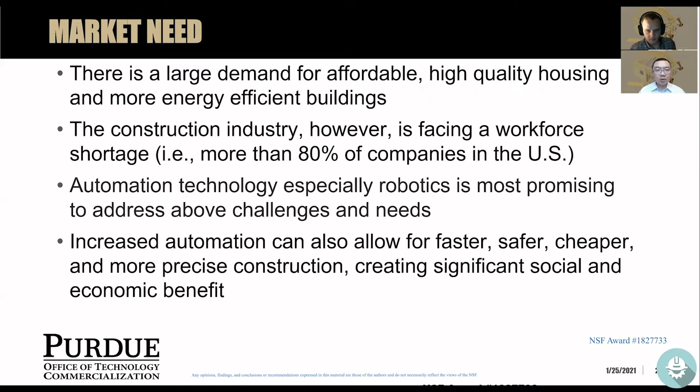Here are some figures that back up what we were talking about. According to market analysis firm Tractica, the global market for construction robotics is set to grow from 22 million globally per year in 2018 to 226 million globally per year in 2025. So there's significant room for growth in this area.

The other factor is the labor force shortages we mentioned earlier. Because of that, the market window for construction robotics is now for the construction industry to reap its benefits.

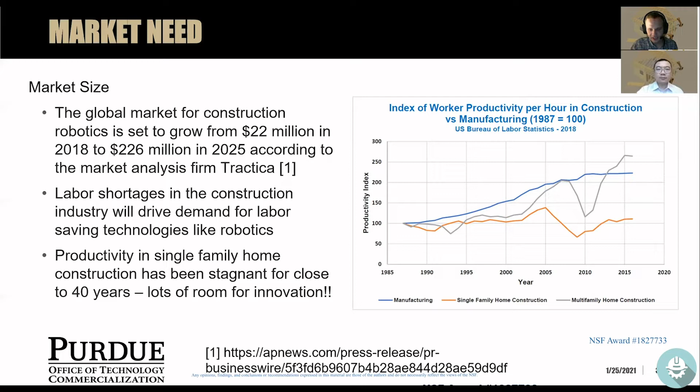The technology we're presenting, which we believe can help address these challenges, is a robotic system for the automated sheathing of timber frame structures. We've developed a novel end effector design that can be attached to existing industrial robot arms to facilitate the sheathing of timber frame structures with the device.

We've also developed a software framework, including a computer vision algorithm, that should allow this system to operate successfully on the construction site. We've completed all the designs for the end effector, in addition to developing and testing the software components, and had plans to test the full-scale device with a KUKA industrial robot arm in a laboratory at Purdue this summer.

But due to COVID-19 related restrictions, we were unable to do that. We're still ready to test the technology and start bringing it into the real world.

We view this system not just as a product in itself, but as a starting point to creating a platform for construction robotics, building a system that ultimately is very modular and able to complete a wide variety of tasks.

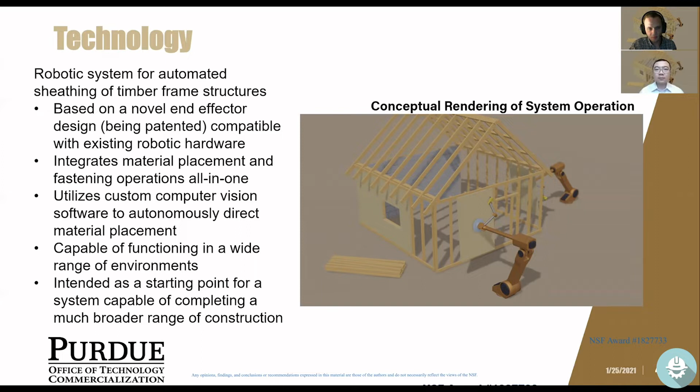Here are some competitive advantages of our technology. Currently, there are no robotic solutions on the market for the automation of timber frame construction on site.

There are existing systems that do a similar task, but they're much more oriented towards operating in a factory environment. We're looking to take that technology and make it simpler, more robust, and able to operate effectively on a construction site.

Our technology spun off from National Science Foundation sponsored research, and we're also in the patenting pipeline for this technology. The integration of paneling placement and fastening into one operation will allow for simpler design, lower cost, and significantly higher speed compared to existing systems.

I'd like to quickly mention the story of Tesla Motors, who changed the conventional welding operation on building the bodies of their Model Y to the forging method, switching 1,000 to 1,500 welding operations into one simple forging operation, which changed the time spent from 2 hours to 2 minutes. Following a similar rationale, our technology is going to build these much faster.

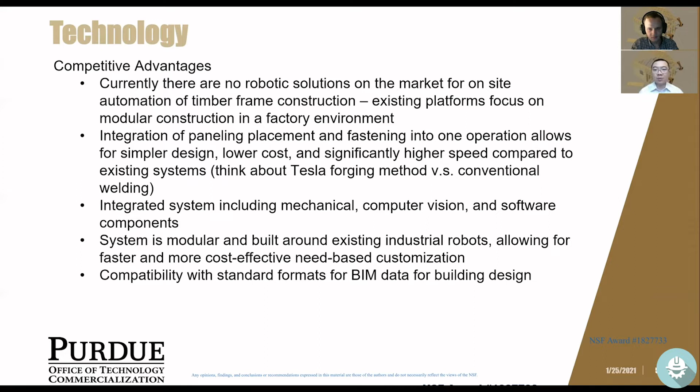So our project is currently in the initial stages of development and testing, and we're seeking partners to help further develop our technology and bring it to market. Thank you very much for watching our presentation, and we hope to hear from you.

Hi, my name is Christopher Carangelo, and today I'm going to be talking to you about polyethylene graphene, or PE graphene, a nanocomposite film with superior mechanical strength.

There are several industries that have an ever-growing need for high strength-to-weight ratio materials. Take, for example, automotive. The lighter the car is, the further it can travel on less fuel. Traditional materials like steel and aluminum, while being cost-effective and easy to produce, are becoming too heavy for the market's current needs. So the automotive industry has become more ready to adopt composite materials, such as carbon fiber, and we've seen it used in the past on supercars.

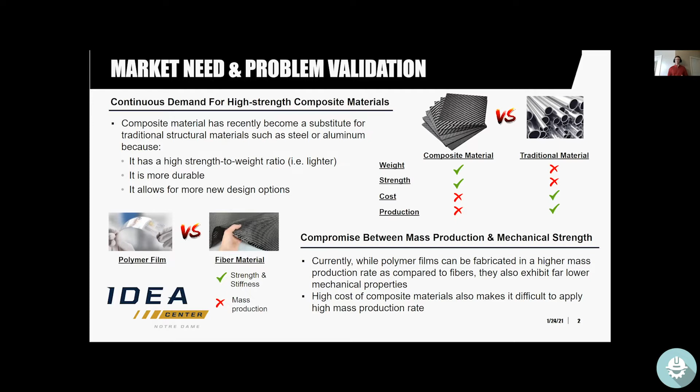However, because of its fibrous nature, carbon fiber has a very difficult and energy-intensive manufacturing process, making it too expensive to be used on mass consumer vehicles. On the other end of the spectrum, there are polymer films. While they are really easy to mass produce and super cheap, they don't boast significant mechanical properties and therefore cannot be used for structural purposes.

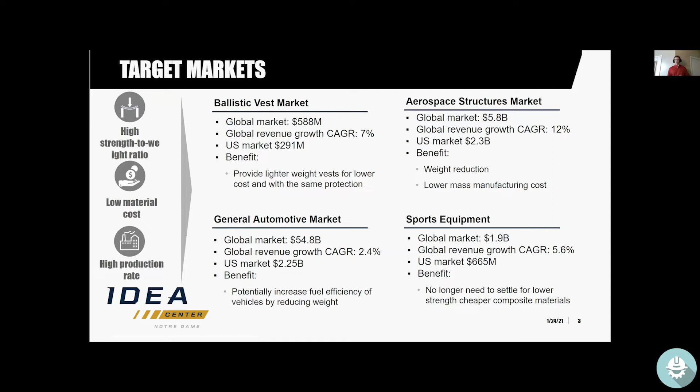But the automotive market is not the only market in need of such a material. The ballistic vest market needs lighter weight vests. The aerospace structure market also needs weight reduction and lower mass manufacturing costs. And the sports equipment industry no longer needs to settle for lower strength, cheaper composite materials. We hope to meet the needs of these markets with our new material, PE graphene.

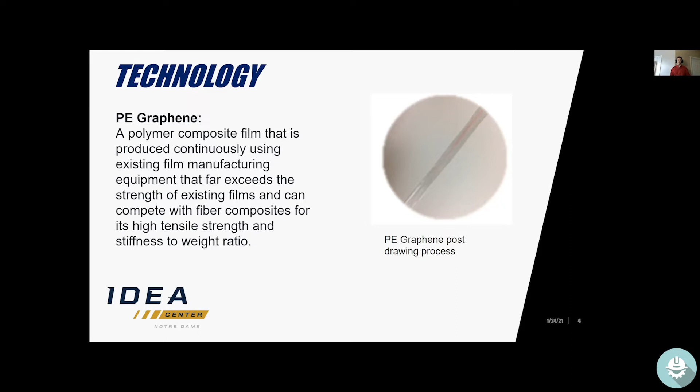PE graphene, simply put, is just polyethylene reinforced with 1 weight percent thermally reduced graphene, and its mechanical properties rival that of the fibrous composites that already exist on the market. Additionally, it is at a fraction of the weight and cost to manufacture because it uses already existing film manufacturing equipment and cheaper materials.

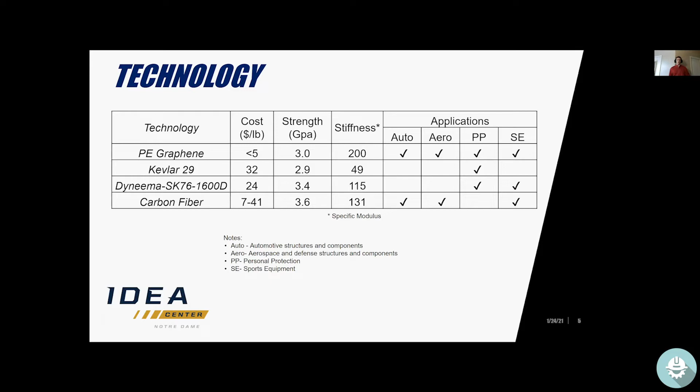As seen here on this table, PE graphene is significantly cheaper than some of its fibrous competitors such as Kevlar, Dyneema, and carbon fiber. Additionally, it is significantly more versatile. It can be used in all the aforementioned industries, while its competitors are limited to only a few.

We are currently looking to finish characterization of the material by running it through tests like fatigue, strength as a function of temperature, etc., and begin case studies, specifically in the automotive industry.

For this, we are looking for two things: an industry partnership that would be able to provide us with a steady stream of ultra-high molecular weight polyethylene and/or graphene oxide. We are also looking for investors to fund these case studies and test the scaling of manufacturing.

We are currently looking for about $100,000 in funds to purchase the necessary equipment to manufacture this at a larger scale and begin prototyping. Thank you for listening and have a nice day.

Hello, everyone. My name is Yanliang Zhang. I'm a faculty member and the principal investigator of Advanced Manufacturing and Energy Lab at Notre Dame. Today, I'm very happy to share with you a very exciting technology we invented in our lab: the functional nanosurfactant systems for printing nanomaterial inks.

First, let me give you a summary about the market advantages and opportunities about our technology. So here we invented a graphene quantum dot-based nanosurfactant with superior properties. This nanosurfactant can reduce the interfacial tension and stabilize colloidal nanoparticle systems. It can generate high colloidal stability inks with improved interfacial bonding and mechanical strength in the printed material and devices. Meanwhile, it also has added functionality due to the semiconducting nature.

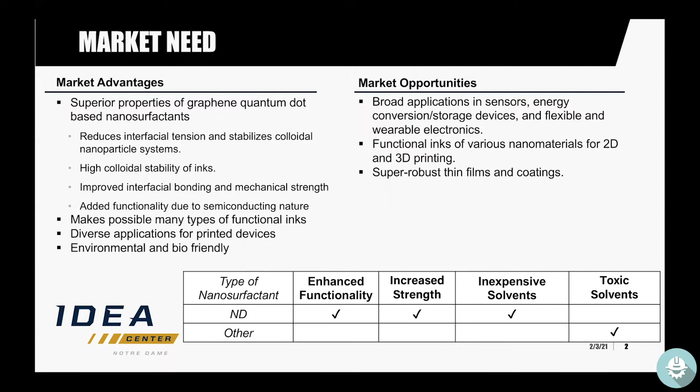I would like to give you an overview about our technology. As you can see, this colloidal nanosurfactant system can be used to exfoliate, stabilize, and formulate 2D nanomaterials in water-based inks for 3D printing applications.

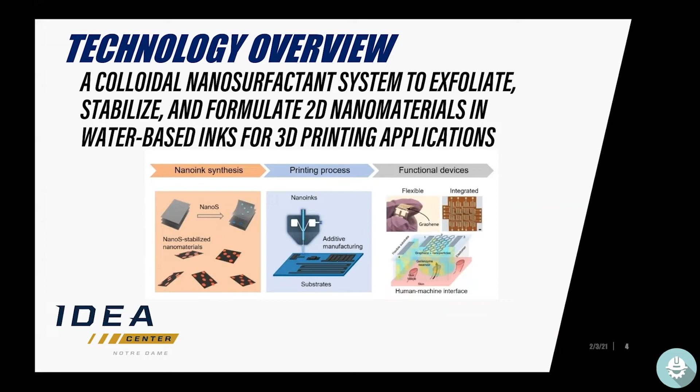Here we demonstrated long-term stability in the nanoparticle ink enabled by this nanosurfactant. We can get over 6 months shelf life in a wide range of inks. Meanwhile, this nanosurfactant also showed a substantial improvement in the mechanical strength in the printed films compared with the same film printed using conventional surfactant-based ink.

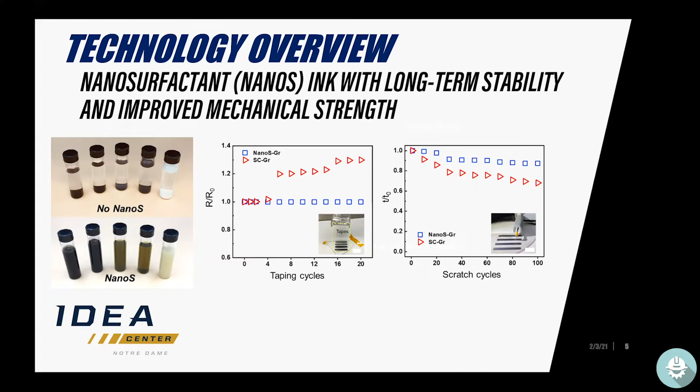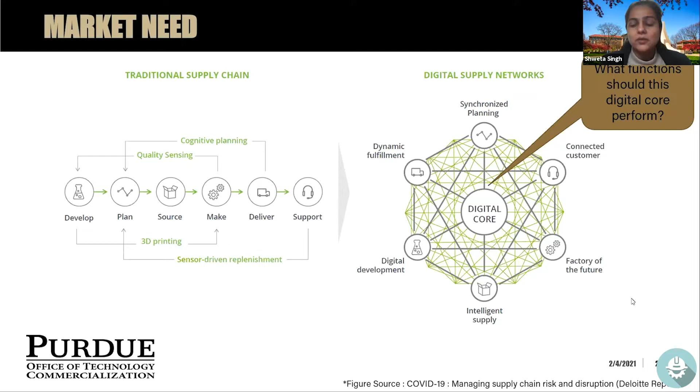But what we want to move towards is more of a dynamic system where we can gain visibility into how the network is evolving as different parts of the manufacturing systems change. So there has to be some kind of digital core, but the question is what function should this digital core platform perform?

What the market needs is faster visibility into any risks that can happen when we gain visibility into the manufacturing networks of suppliers beyond tier 1 and tier 2. So we have to create this digital supply network that can help us build resilience by simulating different scenarios, or thinking about adopting technology A versus technology B.

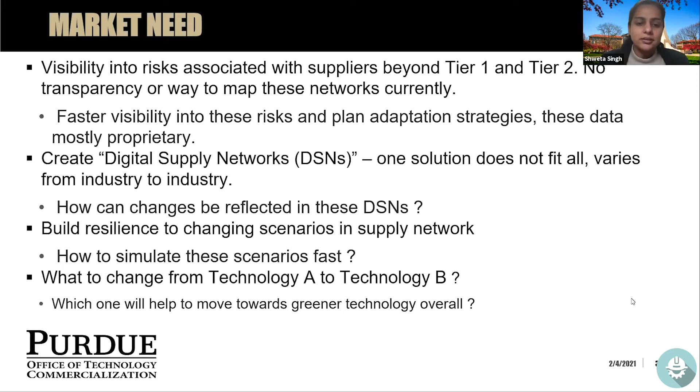If you have a map of the whole network of your manufacturing system based on technology A versus technology B, it can help us see really where the risks exist and what wastes are being generated, and where there are options to actually improve efficiency.

As per a market report, the global market for supply chain analytics tools by 2024 is going to be about 9.2 billion. Among that, cloud-based tools have the highest growth rate, even though their share is going to be about 3.1 billion. So cloud-based tools, which are more collaborative, are a totally unexplored market.

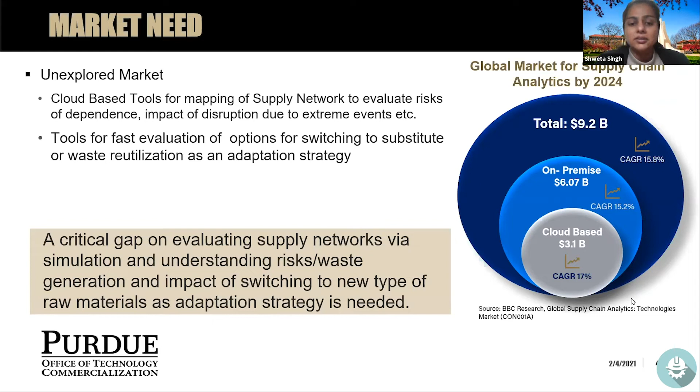What we need is a cloud-based tool for fast evaluation of options. This is the critical gap that our technology has been built to fill, by evaluating supply networks via simulation and understanding the risk of waste generation for switching to new feedstocks, raw materials, or different kinds of technologies.

In short, what this technology does is automate the mapping of the inter-industry network in terms of physical flows, using mechanistic models - first principle physics-based models, process models, and a macroeconomic input-output framework. So if you have technology A versus technology B, that can be simulated on the PIoT hub, and then we can pick from the network maps, after evaluating them for two different technologies, which has lower emissions or waste and a more resilient network structure.

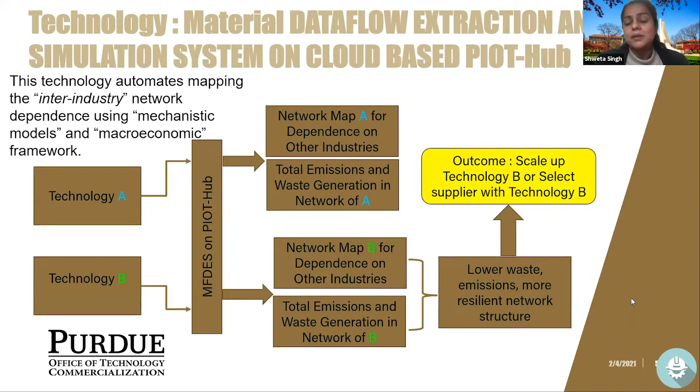So I'll give a quick demo of the tool here.

So I'll quickly demonstrate the use of the tool. We have developed an interface where you can upload engineering models. You can type a simulation name - I'm going to put biodiesel 2, and you can put a description like network of producing biodiesel to understand the dependency on different industries.

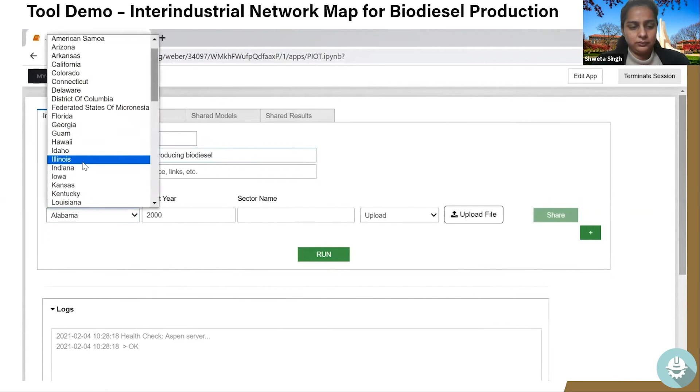And then I can upload models. Since we were also interested in the regional economy, we have this region option, but if you want to just put a particular industry name, that should be fine too. Or you can use the region of the industry where it's located. So this is 2012.

I can just upload the model. Let me say soybean production because I'm going to use the soybean model, so I'll put soybean farming. Then I can add another model - for the sake of time, I'll demonstrate this particular system for one particular user. This is oilseed processing. Upload an Aspen model - I have an Aspen soybean model.

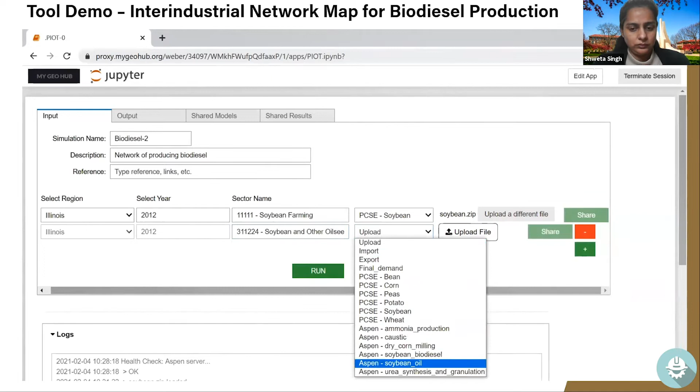And I'll also put another model. Then I can submit the job to the server. When the job is submitted, you'll get this message, and then you need to go to the output tab, and you'll see something like that says processing.

To demonstrate how once the simulation is completed, what results we get - you will get a green status like this. I can click on the simulation completed. What we get is a heat map that basically shows the different industries interacting. You can see that fertilizer manufacturing has a huge recycling stream which is internal, but soybean farming has a very high input to soybean and other oilseed processing.

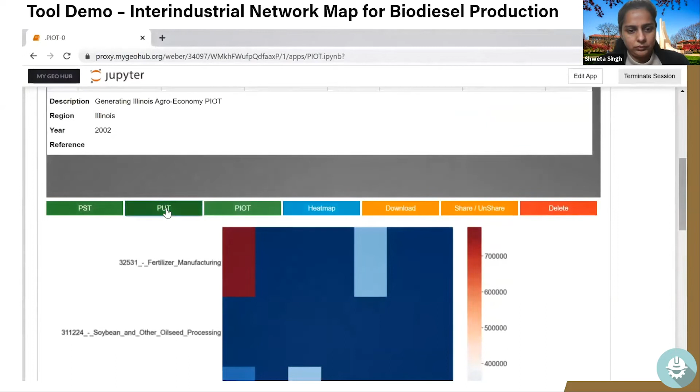So that basically tells how different industries are interacting. We can also convert it into a network view, which we have not implemented on the cloud yet, but we can do that. And then we can have a physical use table and physical supply table, and based on that we can know what different wastes have been produced in this network.

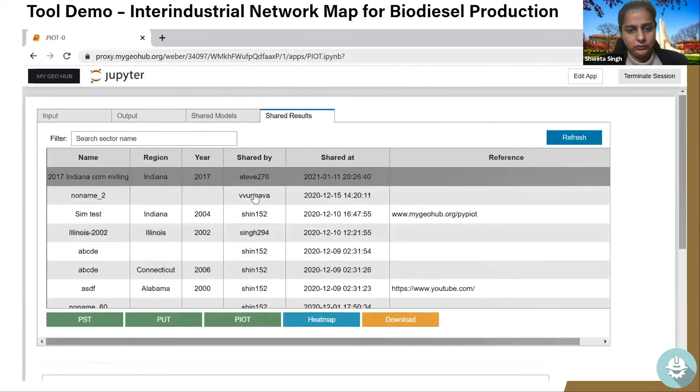We can also see different shared models. If people have shared models like this one, we can download and modify those models ourselves and upload for our own simulation. We can also see if any user has shared results - for example, this user Steve276 has shared their result. We can go into that and look at the description to use their result.

So that's the quick demonstration of how this tool can automate mapping the network of the production system. That can help us know where we can invest to actually reduce our waste or how we are dependent on different suppliers.

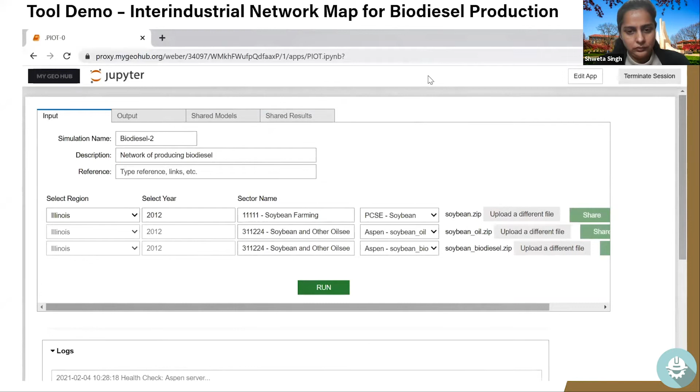So moving forward, in summary, this technology can help us evaluate different technological scenarios to understand how we can lower emissions and waste, but also understand the risks that a manufacturing facility can have on other suppliers' manufacturing network itself - gaining visibility into the tier 2 and tier 3 kind of network. We can form a digital core using this cloud platform to do scenario analysis and decide which one is the best technology for us to move forward.

Compared to other technologies existing on the market today, like SAP, which basically helps in inventory management and a lot of supply chain management, the advantage in our tool is that we are integrating engineering-based models. So if you have a future technology, you can actually embed it in our tool and see how the network will look in the future, not just the existing one based on empirical data.

And then we can also automate - which I'm not sure if SAP does, but I know that other tools like SimaPro LCA, and OpenLCA did not have - automation of quantifying waste and emissions just based on the first principles model rather than relying on some empirical data correction.

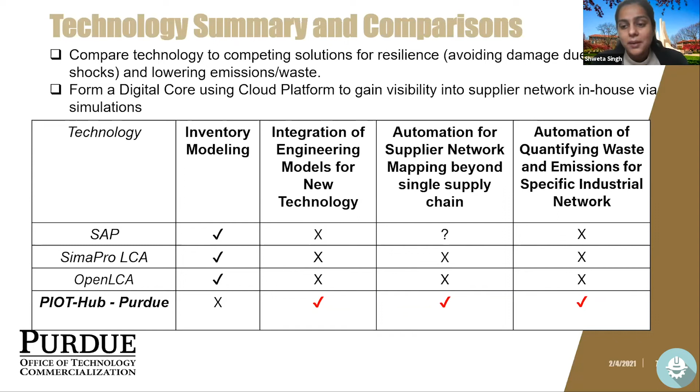So at this stage, we are looking for early industrial testers and investors to scale up and build industry-specific functionalities. As this tool is a very generic one, we can adapt it to different types of chemical manufacturing or pharmaceutical manufacturing, but also automotive packaging industries based on the first principles model we can create with industry partnership.

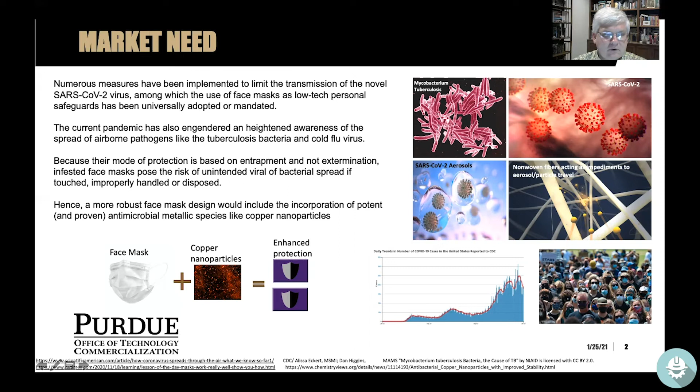However, what we do know is that if you have something that's antimicrobial and you have a mask, you want that antimicrobial component to remain a part of the mask. So in our particular approach to the technology, we take an existing technology like electrospinning - nothing particularly new, been done for decades - and it can make a non-woven fabric. The fabric is flexible, it can be used in a mask, or it can be used as an insert in place of a mask. What we do is put copper nanoparticles onto that non-woven polymer fiber.

So we have fibers that are somewhere between 100 nanometers and a micron in diameter, and we coat them with copper nanoparticles. The key here is that electroless deposition, also not a particularly new technology, has been around for over 100 years. If we use the right conditions and create the right morphology, we can get well-adhered copper nanoparticles onto this electrospun fiber mat or fiber mask.

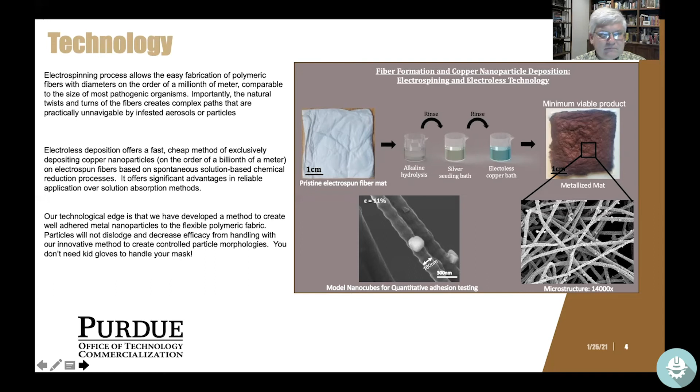If we compare this to some of the competitors out there, most of them take copper nanoparticle solutions and immerse mask material into that solution. There's a problem with that - it wastes copper and you get agglomeration. Our technology only puts copper down where it goes onto the mask. It saves money, makes it relatively inexpensive, and easy to scale up.

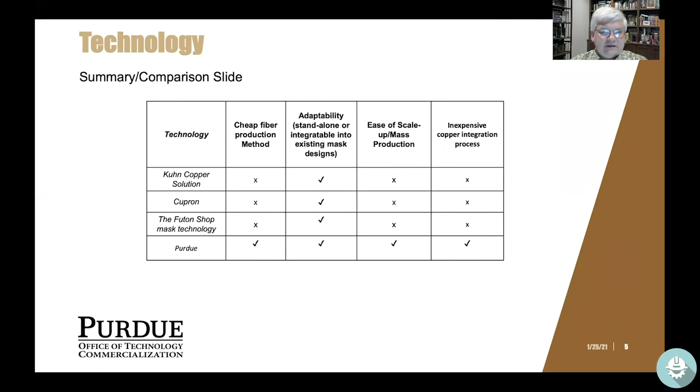What we're looking for are partners to look into efficacy and reliability studies. This was funded under National Science Foundation funding. We're looking at how particles adhere to polymers, and we've figured that out. Now we need to look at how we take nanoparticles that have been proven to be effective antimicrobial components in other materials and ask: will that work in this mask geometry?

So we're looking for collaborators to fund efficacy studies, as well as investors looking at scaling up production, and then partnering with existing mask manufacturers to get this out as quickly as possible. Thank you, and I look forward to answering any questions you may have.

We would like to present to you silicone padding embedded in fabric.

Our technology centers around silicone padding, which is created by mixing air bubbles into a silicone monomer with appropriate additives. The silicone mixture is then poured into a two-part mold, which creates the final desired shape. The permeable fabric is laid inside of the mold, and a vacuum is pulled during curing. This allows the silicone padding to bind to the permeable fabric material during the curing process.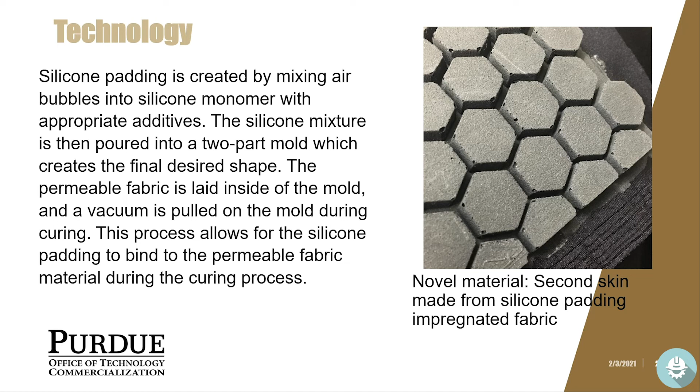Some of the commercial applications include protective garments, gear, and equipment in sports, primarily contact sports, whether that is contact between player and player, player and object, or player and surface. This can include padded apparel, which can be elbows, garments, or thigh protection, second skin, and helmet padding.

Short story about a possible use. Jerome, a Purdue men's rugby player, suffered a first-degree separation of his acromioclavicular joint during the game after a collision with an opposing player. The team physician evaluated the injury and stated that the player was allowed to return to the game if the joint was properly protected.

At first, he recommended a second skin he had in his first aid kit. However, Jerome was hesitant because previous use of this specific second skin from an unnamed company proved to be ineffective. Nonetheless, he wore our second skin throughout the remainder of the game and was able to tackle with that shoulder and not feel intense pain.

Silicone padding embedded in fabric has three major use cases. The first use case is as a second skin. Both McDavid and DJO Global products, pictured below, sell for around $15 per roll.

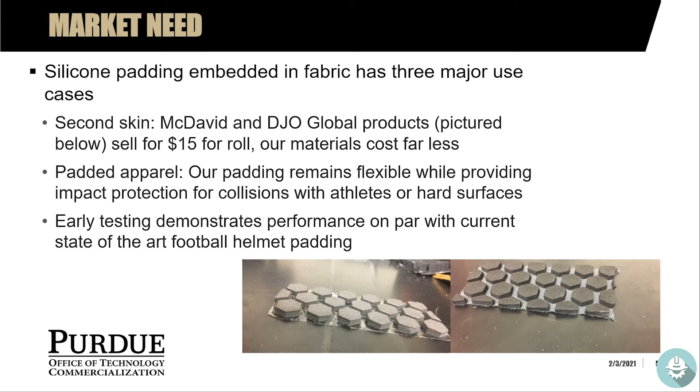The advantages of silicone padding embedded in fabric set it apart from other existing paddings. Our padding has superior energy absorption properties, meaning in one layer it can reduce peak impact force by up to 50% above 3 or 4 layers of competitors in laboratory testing.

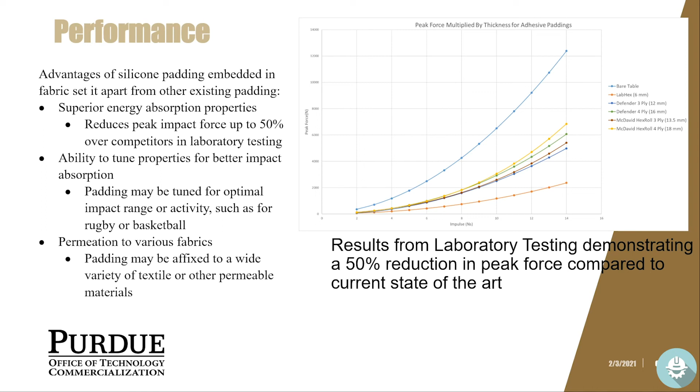What we are looking for is an appropriate partner to license this padding technology or to engage in a joint development agreement with the HURT Lab at Purdue University. Thank you for helping us develop this exciting new technology.

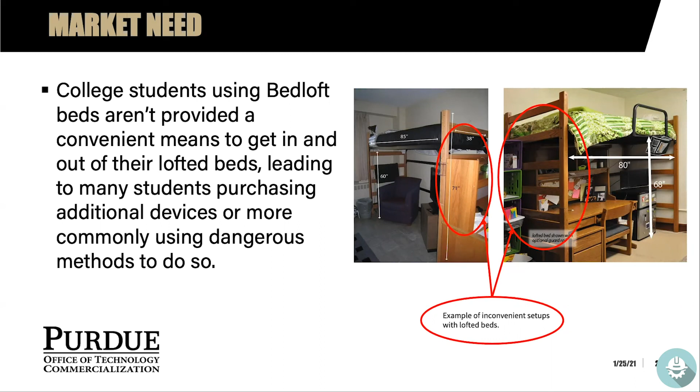And specifically, they supply a lot to the Big Ten Conference, which is the one that Purdue's in, meaning that they have a big marketplace with the bigger universities around.

Now going to the technology, the Stow Step is an auxiliary step that connects to the lofted bed railing system and creates an easy way to get up on the bed. Simply, you just hook it onto the existing railing system of the lofted bed in whatever increment you please, and you just step up and step down as you please. When you're not using it, you can put it up into its rest position to allow for more space underneath.

The Stow Step is made out of aluminum for its main body, which is the part that connects to the railing, along with the step being made out of high-density polyethylene, and that's all to help reduce costs for the product.

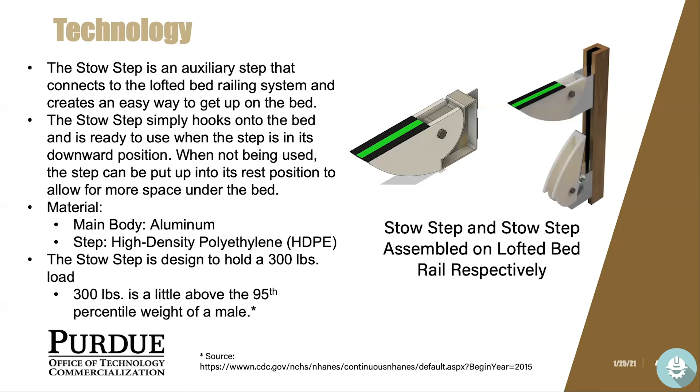One of the major design criteria we held was that the step needs to hold a 300-pound load, and the reason why 300 pounds is because that's a little above the 95th percentile weight of a male, in order for our product to cover the majority of people coming to the university. That 300-pound figure is collected from the CDC.

When comparing to the current technology, which is comprised of the built-in ladder and the bunk bed ladder, in terms of safety the built-in ladder is the least safe. Even though it is the largest ladder out of the three, the steps themselves are polished wood, and stepping on it could potentially cause a slip, especially if you're wearing socks. On top of that, these ladders are rather high, and some of these dorm ceilings are rather short, so a lot of people have hit their head on top while trying to get over it.

When looking at the bunk bed ladder, it is easier and safer to use because it is a more open space, but oftentimes the steps are not customizable and there's no grip tape on it, which makes it harder for shorter or taller people to stride up without any discomfort, and also still a potential slip.

The Stow Step tries to fix both of that by allowing that auxiliary way to get up into bed, but also having grip tape and glow-in-the-dark tape on it to not only be able to see it at night, but also to not slip as easily from it.

When it comes to space, the built-in ladder doesn't take up any additional space, but is often compromised due to furniture location and not being able to use it because of that. The bunk bed ladder takes up the most space compared to the three because it's always in that position and doesn't move anywhere. While the Stow Step, even though it takes up a little additional space, it could be put up into its rest position to allow for less space to be taken up.

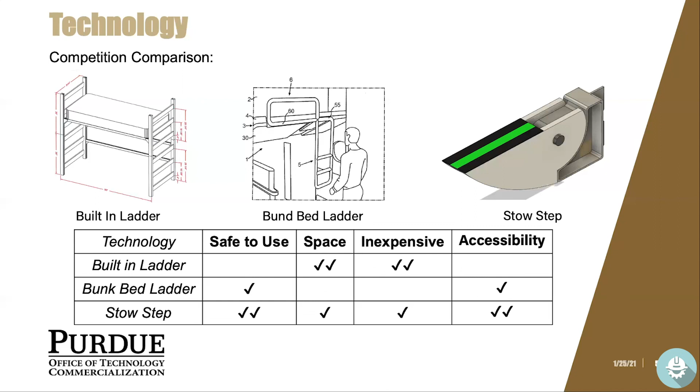Finally, when it comes to accessibility, as mentioned before, the built-in ladder is not very accessible most times due to the way people configure their furniture, often leading them to jump on their desk or the windowsill to get up into bed, which is rather dangerous. The bunk bed ladder is only accessible from one side and is harder to adjust the steps for taller or shorter people, while the Stow Step could be put on either side of the bed and in any configuration desired by the user. So shorter people could put them closer together, while taller people could put them farther apart to help with their stride.

The next steps for our product: we're looking to license out the technology to a customer, maybe one of the loft bed companies, hopefully a manufacturer that's interested in selling the product. We would also appreciate any connections to companies or personnel that would be interested in helping us commercialize our product.

I'm very passionate about this product because I've been working on it since sophomore year, so roughly two years, and I really think it could help students make their lives a lot easier. Thank you for listening and enjoy the rest of the conference.